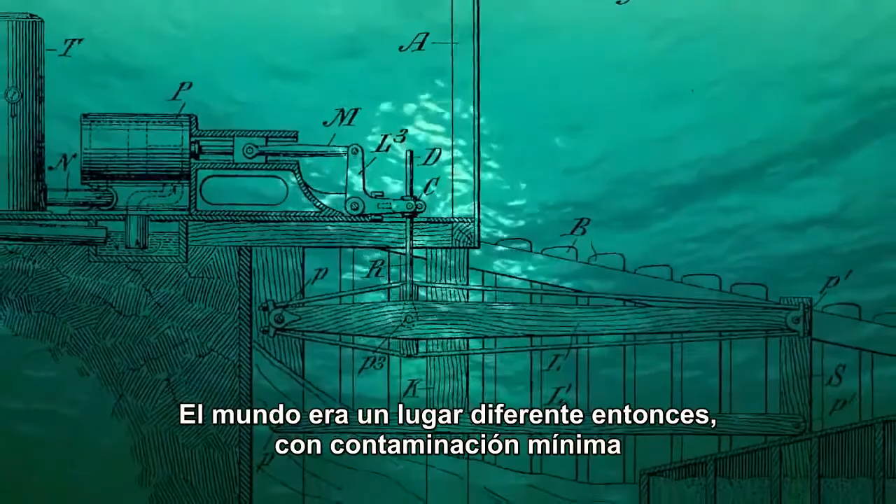We've come a long way since the Frenchman Girard and his son patented the first wave energy device back in 1799. The world was a different place then, with minimal pollution and no greenhouse effect to worry about.

Since then, there have been many differing forms of energy generation with varying degrees of renewability, from windmills to watermills, and from horsepower to fossil fuel. But there is an effective source of renewable energy all around us: the oceans of our planet.

The burning of fossil fuels over the past 50 years has resulted in increased levels of CO2 in the atmosphere. This is leading to global warming with the resulting consequences for our lifestyles and environment. Scientists and engineers have been working hard in the search for sustainable ways to feed our communities with electricity.

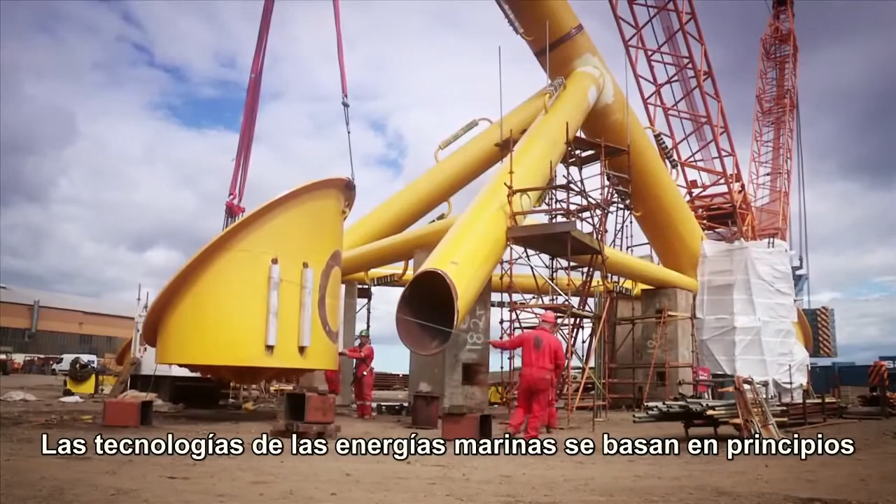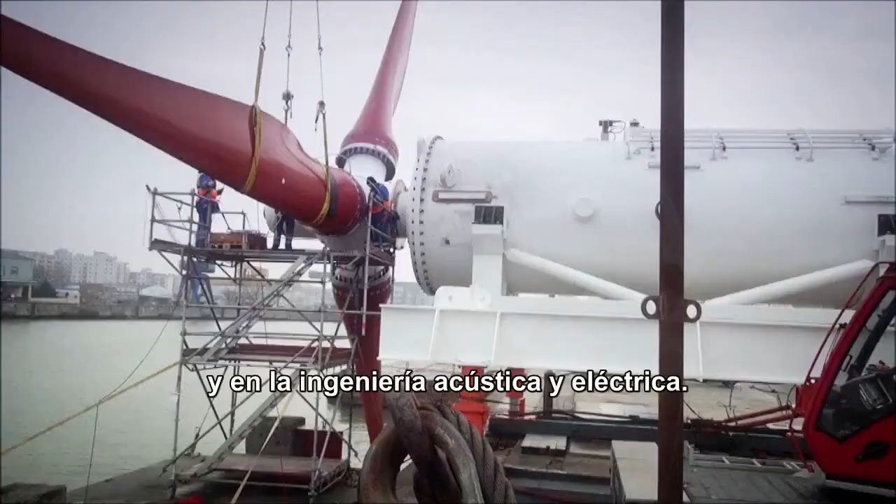The case for ocean power has always been strong. Ocean power technologies are based on well-understood principles derived from physics, marine design and construction, and on sound mechanical and electrical engineering - principles and practices which have been understood for hundreds of years.

The energy in waves comes from the wind as it blows across the surface of the ocean. The energy in waves is tremendous. An average 1 meter, 10-second wave striking a coast can deliver more than 7 megawatts per kilometer of coastline.

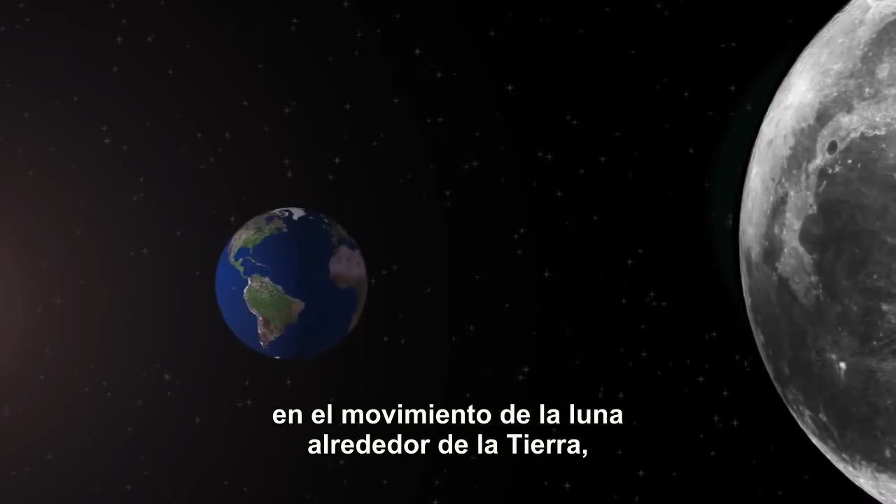Tidal energy relies on the movement of the moon around the Earth and the Earth around the Sun. The gravitational pull moves billions of litres of water thousands of miles in relatively short time spans. No man-made device could do this. These vast movements of the sea carry within them non-polluting, reliable and predictable energy.

As well as the massive movements of the tide, there is always an unseen underlying flow. This flow moves millions of litres of water per second. By placing turbines in the flow, the energy can be harnessed and converted to electricity.

In the Bay of Fundy, the first Canadian deployment of commercial tidal turbines on an unprecedented scale is proposed. It will provide the potential to power over 20,000 homes and will be the largest tidal stream generator in the world.

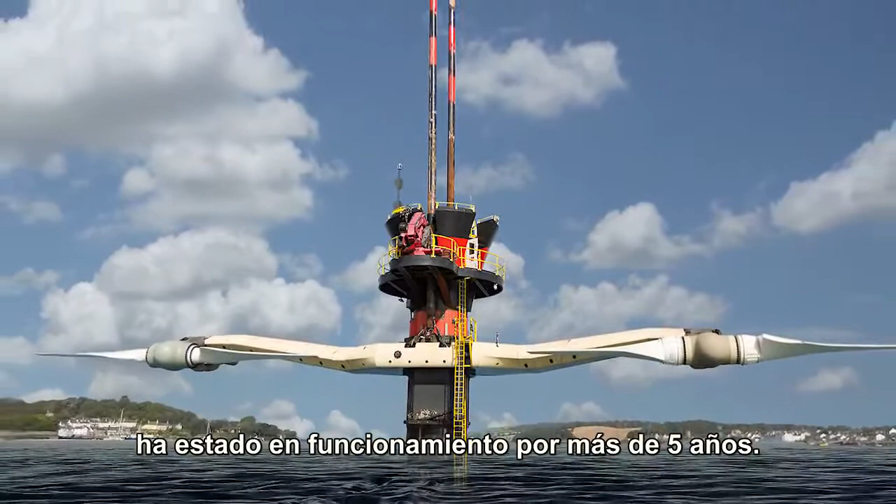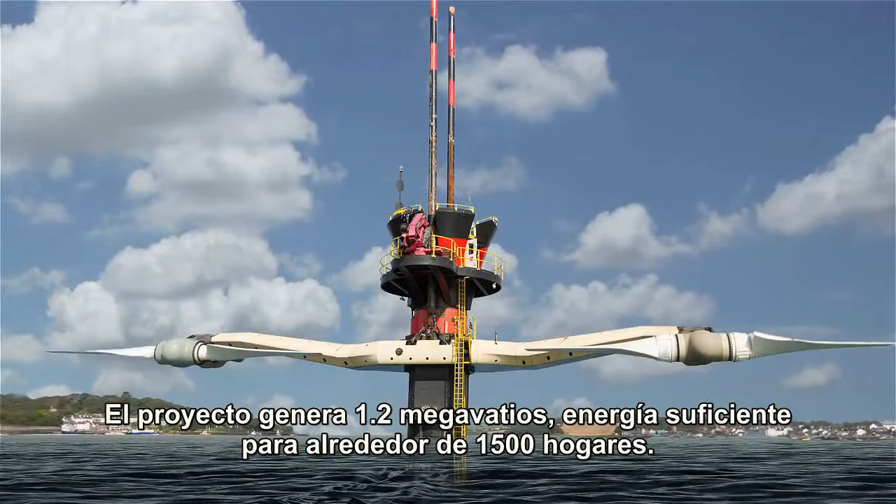In Strangford Lough, off the Northern Irish coast, a tidal flow generator has been in operation for more than 5 years. It operates in an area designated as a wetland of international importance and is protected by the UK as an area of special scientific interest. The project generates 1.2 megawatts, enough power for around 1,500 homes.

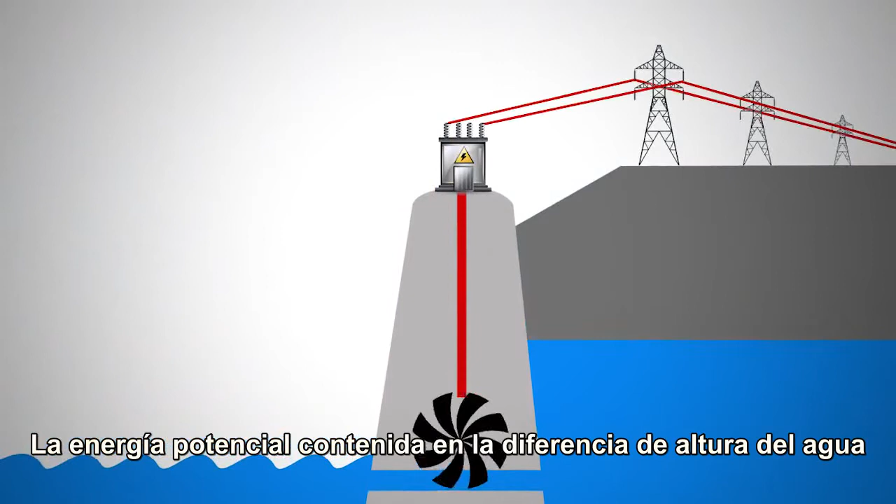The potential energy contained in the difference between the height of water at high and low tides can be harnessed using technologies such as tidal barrages. In northern France, the first large-scale tidal power plant became operational in 1966.

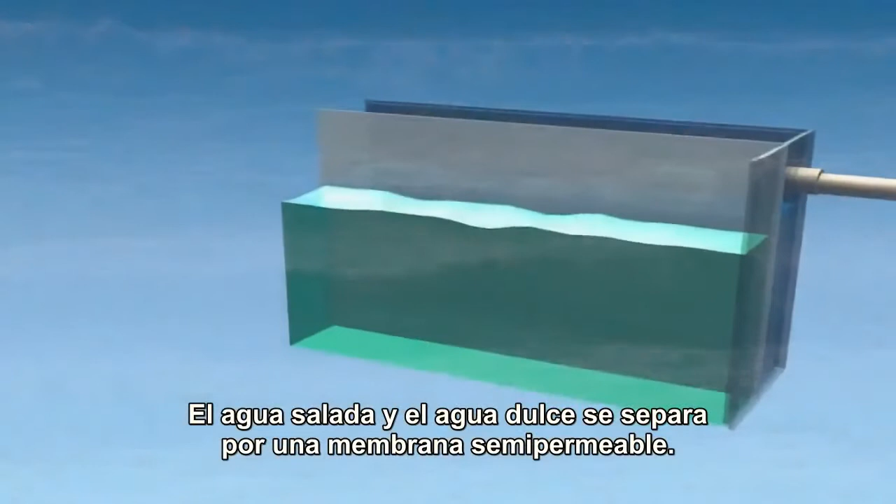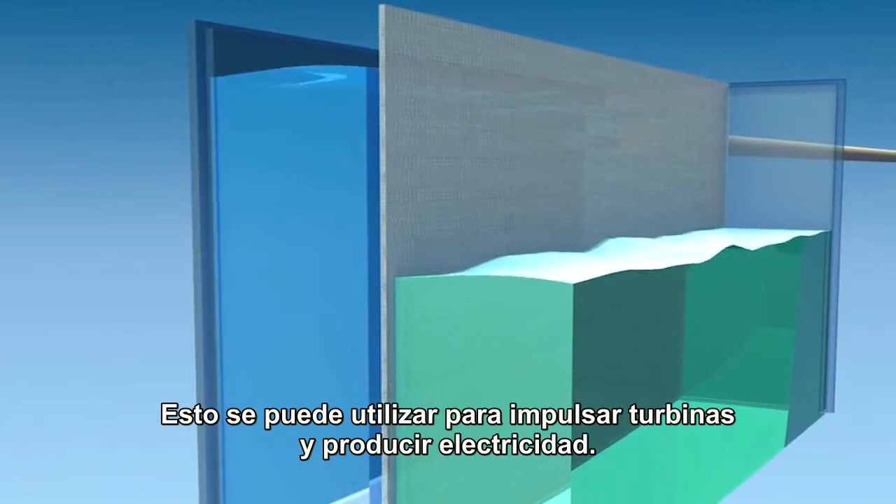Where freshwater rivers meet salty seawater, the difference in salinity can be used to generate electricity. The principle is simple: saltwater and freshwater are separated by a semi-permeable membrane. The freshwater migrates to the saltwater, thus increasing the volume and consequent pressure. This can be used to drive turbines and generate electricity.

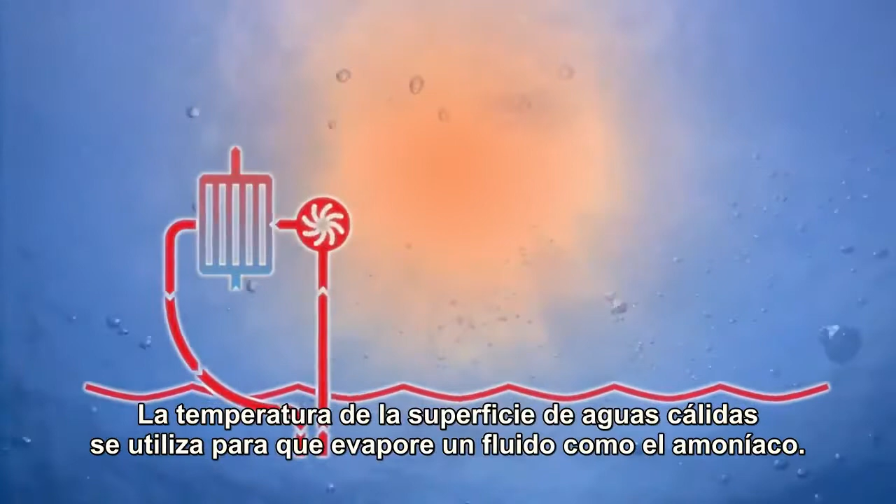Ocean thermal energy conversion makes use of the vast solar energy stored in the upper layers of the ocean. Heat from the warmer surface water is used to vaporize a liquid such as ammonia. This rotates a turbine which drives a generator to produce electricity. Deep, colder ocean water cools the ammonia, which condenses back to liquid to be heated again in a 24/7, 365 days a year cycle.

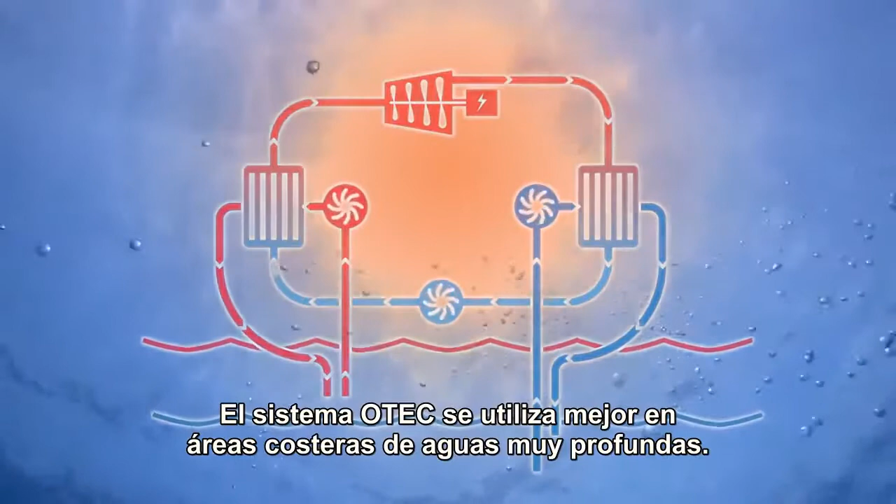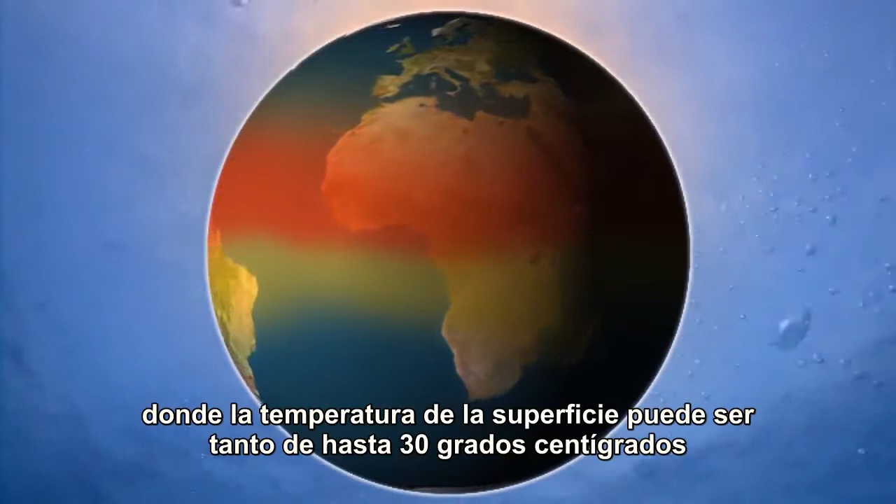OTEC energy is best used offshore in very deep water. Ideal locations are found along the equator, where the surface temperature can be as much as 30 degrees centigrade higher than the deep water below.

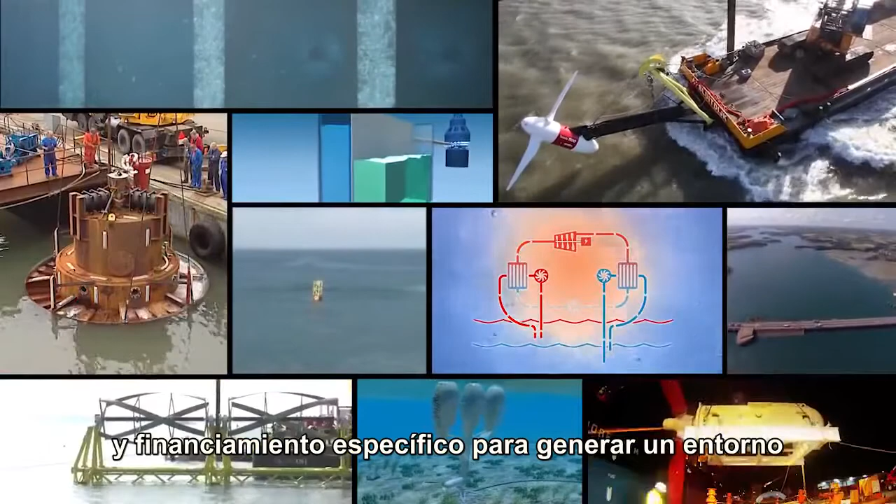Throughout the world, there is a growing confidence that the technology is maturing. The main challenge is the development of reliable and cost-effective technologies to harness the huge renewable energy potential of the oceans. For this to succeed, clear government commitment and targeted funding is needed to create an environment that encourages investment from large multinationals. The International Energy Agency supports international energy technology research, development, deployment and knowledge transfer through multilateral groups.

Ocean Energy Systems is one of the initiatives within the International Energy Agency. It was formed to unite the efforts of every country in bringing ocean energy to market as a practical economic alternative to traditional fuels. Year on year, more and more countries commit to this cause in a spirit of global cooperation and intent.

As the 21st century matures, just two things are certain: the increase in climate change and global warming, and the ability of the oceans to deliver a predictable, renewable, perpetual, carbon-free and sustainable energy supply.